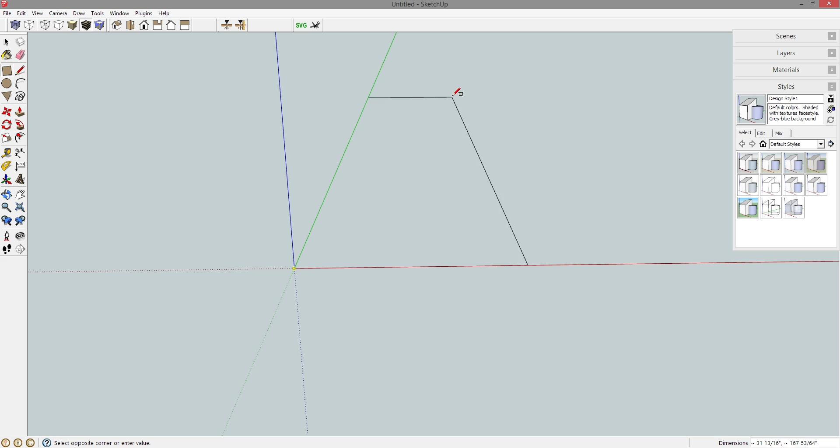But first I need to figure out my space, so let's draw the walls really quick. R for rectangle, the distance this way doesn't matter, but the distance left and right I do have a specific distance, so I'll draw my rectangle. First dimension is the longer of the two. Let's go with 33, comma, enter.

P for push-pull, let's go up 96 inches for an 8-foot wall. This particular wall is more than that, but that's all I need. It doesn't really matter. And let's grab this line.

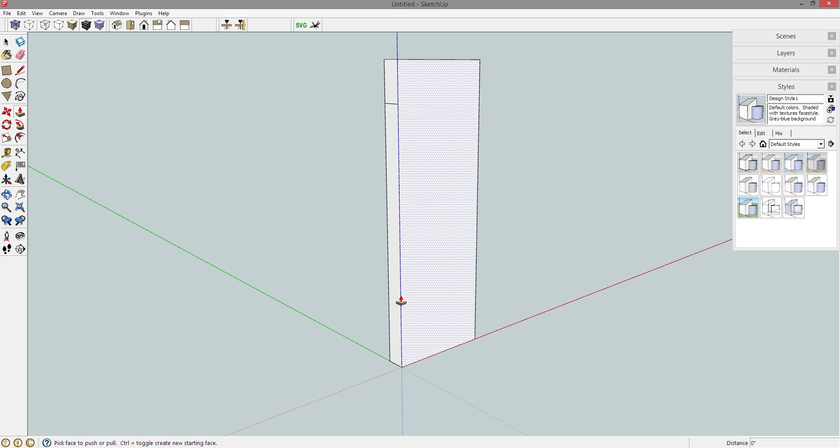M for move, control brings up copy, and let's push this up 83.5, enter. So basically, there's a doorway right here. This is the outside measurement of my molding, the door trim. This is the actual wall space that there is.

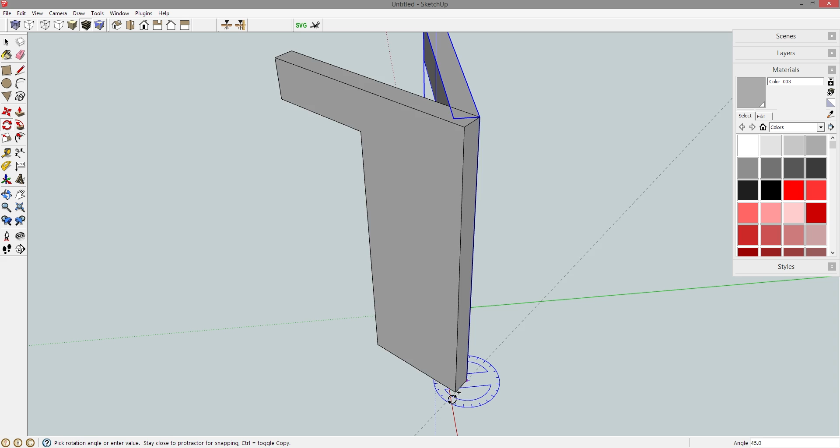Spacebar, triple click, G for component, enter. And let's go with gray because my wall is painted gray. Q for rotate, and I'm going to rotate another one of these along the blue plane. Control brings up copy, and let's rotate this 90 degrees, enter.

Because I have my front door coming in here, and then this is going into the hallway, and then this is the space that I want. But this is only about 10 inches.

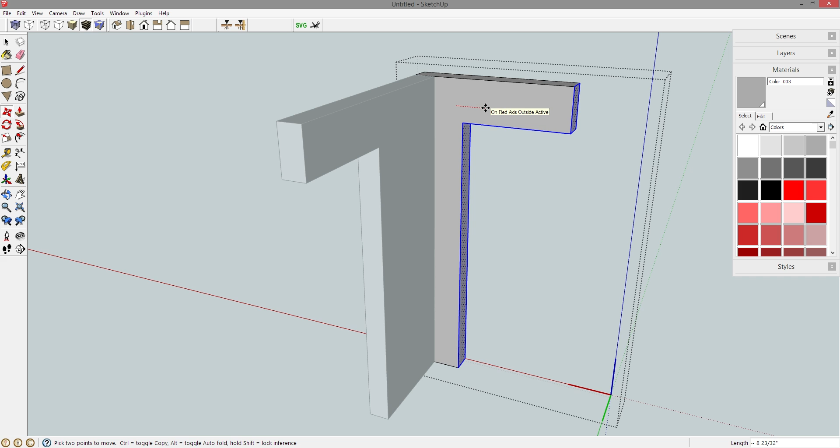So let's right click and say make unique. You are no longer a copy of this one. Let's double click to edit the part. Grab all of this, M for move, and let's move this to the wall. Move this constraining to the red axis to the wall, and then move it out 8 inches, enter. I think I got 8 inches there, maybe 10 inches, but anyway, that is an accurate representation of the wall in my house in which this project will be located.

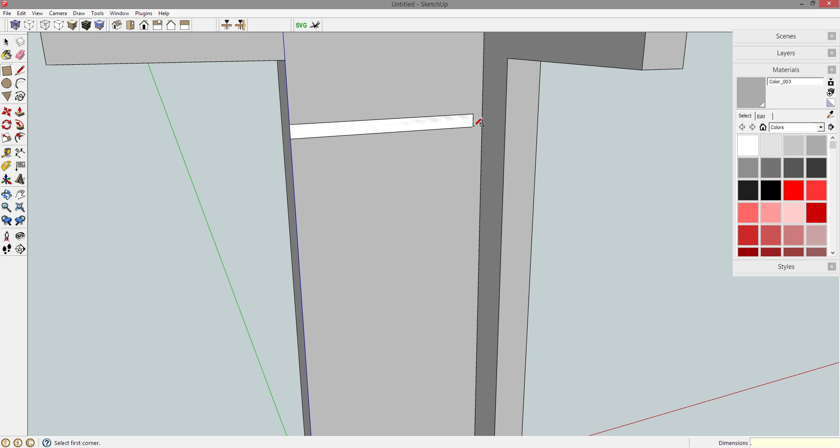So let's start drawing it. This is 33 inches, let's go 2 inches less than that, so R for rectangle, let's go this way. The dimensions say the smaller one is the first dimension, so 0.75, comma 31, enter. P for push-pull, and let's pull this out 6 inches, enter.

Spacebar, triple click, G for component, enter. This is the top shelf. Let's throw some color on it. And I want to center this on the wall. It's 2 inches shy of the full width here, so M for move, and let's move it in 1 inch, enter.

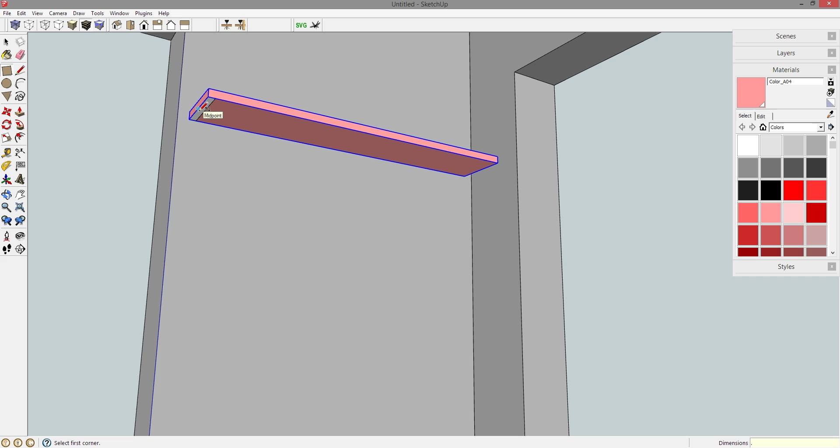Down from that, I'm going to have 2 vertical side pieces. So R for rectangle, and I'm just going to draw one right here. The dimensions say that the first one is the thickness, so go 0.75, comma, enter. P for push-pull, I'm not entirely sure on the full distance here, so let's just go with 10, enter.

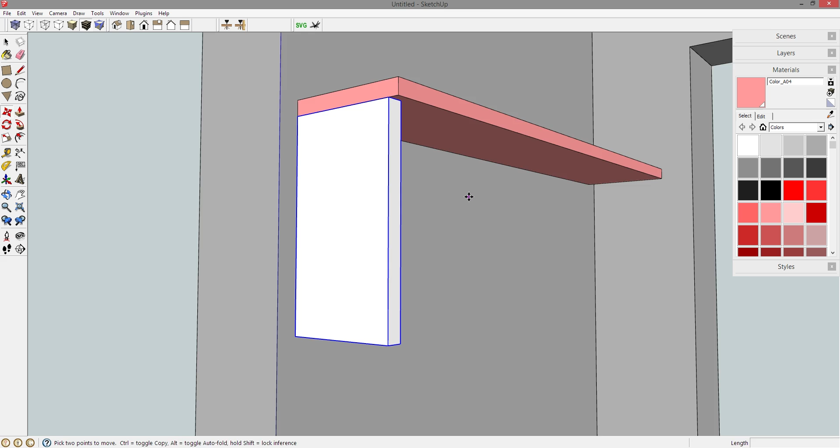Spacebar, triple click. Ooh, I want an overhang in the front, so let's back up a second. Let's click on this face, P for push-pull, and let's push this in 0.5, enter. Now, spacebar, triple click, G for component, enter. M for move, and let's move this in 1 inch, enter, for a 1 inch overhang.

Same thing on this side, so M for move, control brings up copy. Holding shift to constrain to the red axis once it is highlighted, and drop it off on the far right side, then move it in 1 inch, enter. Let's go with the next color here, which is yellow. Drop yellow on these 2 parts.

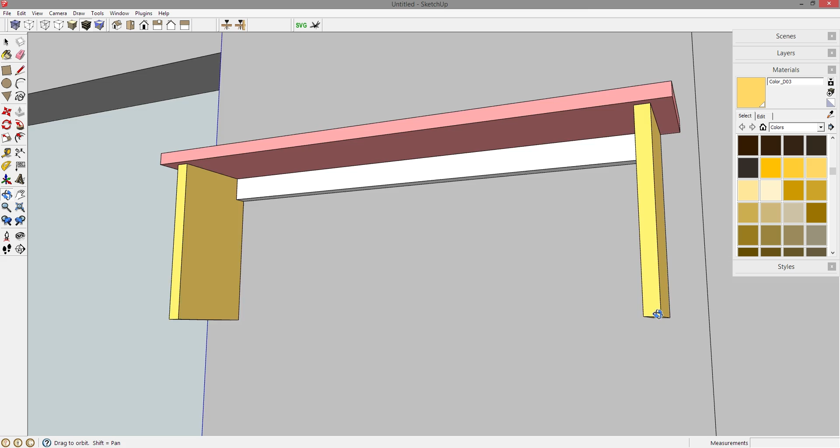Now, I've already looked through Google Images and figured out what I like, what I don't like. I'm kind of going for mission style here, so let's draw the top back rail, R for rectangle. And the first dimension is the longer of the two, so let's go 1.5, comma 0.75, enter. P for push-pull, let's pull this all the way over to this inside face on this piece over here. Spacebar, triple click, G for component, enter.

It is a new part, so it gets a new color, green is next. And let's go with the second rail, there's going to be another rail with a bunch of stiles in between. So M for move, control brings up copy. Let's copy one right down there, and then move it again.

4 inches, enter. So there's going to be 4 inch rails. Now this one's going to be a different size than this one. I've already determined that this needs to be 5 inches for the hooks that I've already got purchased. So let's right click and say make unique. You are no longer a copy of this one. And let's drop a different color on it.

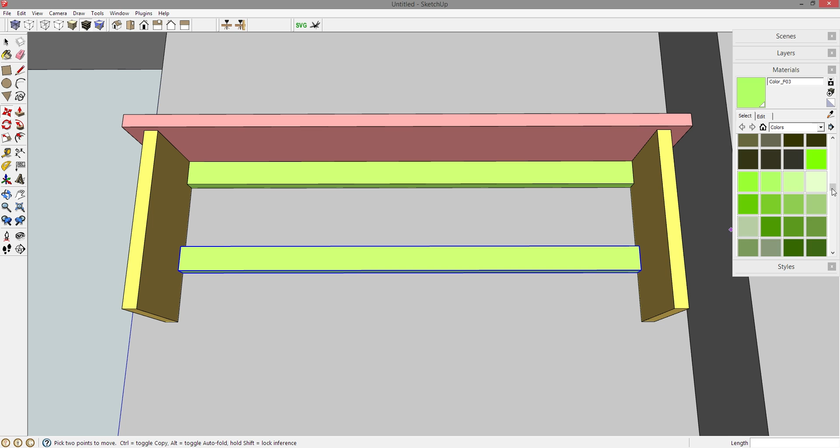That's fine. Spacebar, triple click, or spacebar, double click to edit the part. P for push pull, and it's already 1.5, and I want to go 5, so 3.5, enter. That's a 5-inch board.

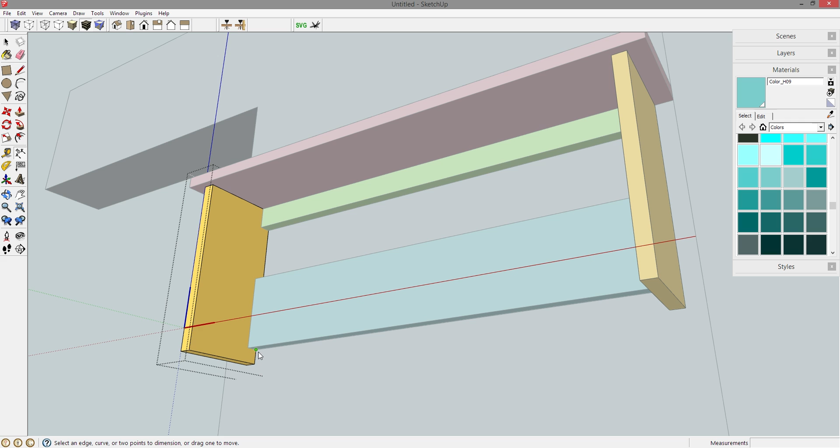This needs to be longer on the sides. So let's double click that part, grab this bottom face, P for push pull. Let's push it down to the bottom and then add another 0.5, enter. And let's go a little bit longer than that. Let's go with 1 inch, enter. So now it's a full 1 inch below. This is a full 1 inch below. There we go. So I'll still modify the sides, but I think that's going to be the accurate length.

Let's work on these rails to go in between. R for rectangle, and I'm just going to copy this shape here. The first dimension is the longer of the two, so let's type in 1.25, enter. P for push pull, and let's pull this down to here, to this edge.

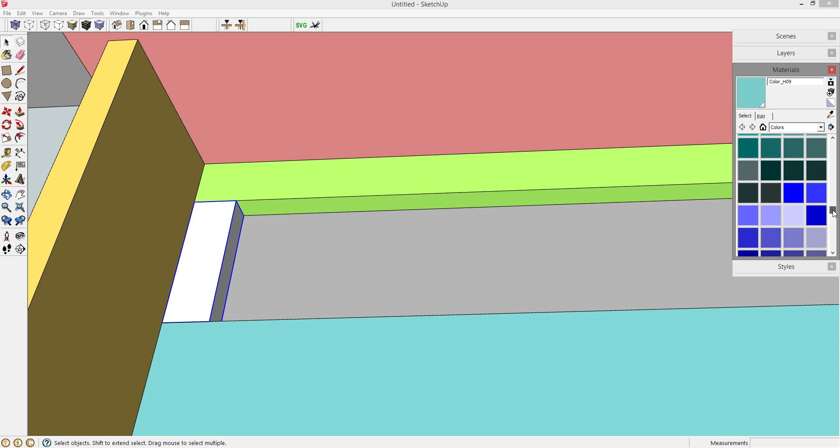Spacebar, triple click, G for component, enter. And this is a different color. Let's go with purple. So that's 1 1/4, and I want even size spacing in between. So M for move, Control brings up copy. 1 1/4 plus another 1 1/4, that's 2.5, enter.

X10 to multiply it by 10, that's too many. X9, that's too many. X8, that looks about right. D for dimension, what do I have right here? D for dimension is a custom keyboard shortcut I set up, by the way.

We've got 6 1/4, half of 6 1/4 is 3 1/8. So let's use a window to select all of these. M for move, use a window to select all those. M for move, there we go. This direction, 3.125, enter. And now this distance should be the same as this distance.

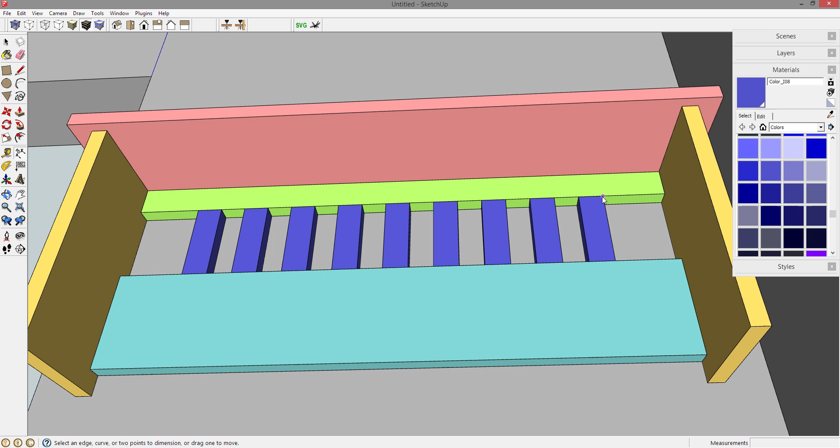It is, those are perfectly centered. So let's work on these shapes. These need to be shaped somehow. This is all arbitrary. You can do whatever you want here, but let's double click that part. T for tape measure, and I'm just gonna go with a long swooping curve.

So let's go down 1 inch, enter. Let's go this way by 0.5. What does that give me? That gives me 4 1/4. T for tape measure, let's go more than that 4 1/4. Let's go 5.25, 5 1/4. So this is the arc shape that I'm going to get, and this is the straight line.

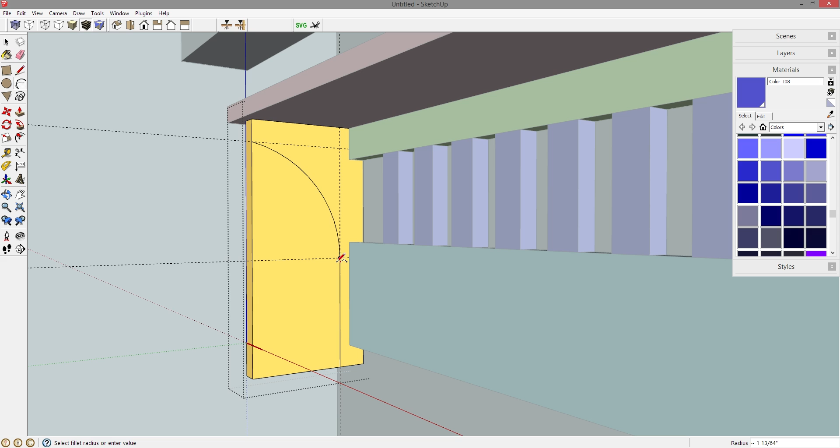L for line, let's go up here. A for arc, starting here, ending here, and I can drag until it's tangent at vertex. That means it's a perfect transition from the straight line into here. That's what I want. P for push pull. Let's push this way and delete it. Spacebar to select all of these hidden lines, or guidelines I should say. Delete those, click to get out of the part.

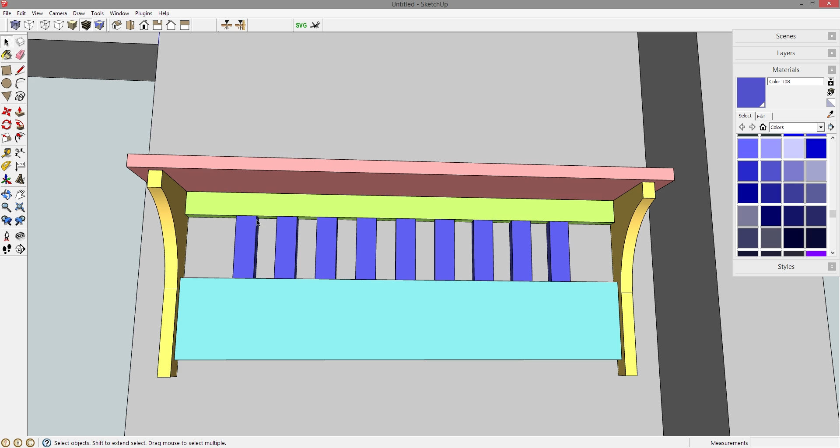And I like that. Simple, yet elegant. The joinery, totally up to you. Whatever you want to do. You can use dowel joints, you can use whatever. But something I will share about this, let's go ahead and hide this side piece. I'm probably going to use floating tenons. It's quick and easy for me.

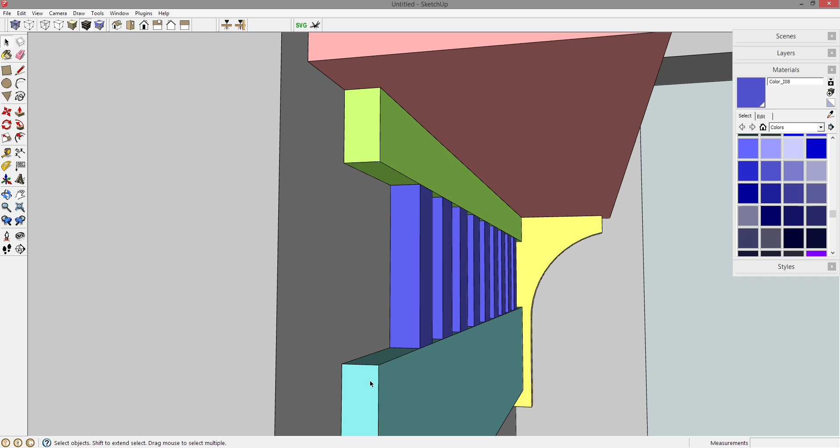But if you can do tongue and groove joinery on the table saw, then you can do a groove here, and then just use a typical tongue and groove joint for all of this. These will fit into the top and bottom rails just fine. And then cut some square stock to fill up the groove, and cut a bunch of spacers that will fit in between here. You'll get even spacing. It'll cover all of the grooves, both the top and the bottom, and that should be pretty easy. So there's multiple ways to do everything, obviously.

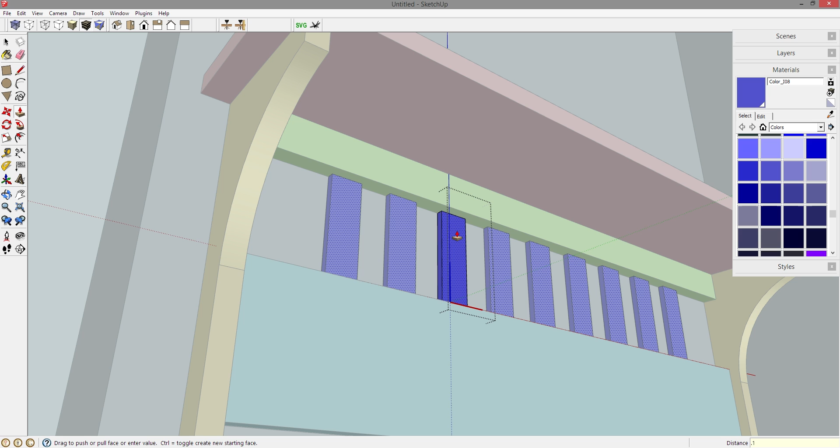Let's unhide to go back to where we were. I do want these rails to be inset slightly. So let's double click that part. P for push pull, and I'm going to push them in 0.125, enter. Just gives it a little bit more look to it, a little bit more depth, which I like. And of course, edge detail can be accomplished however you want as well.

Let's make a quick little layout for this, materials list or whatever, figure out what we need to make this project. First, I like this camera angle. I'm just going to make a scene and call this new scene overview.

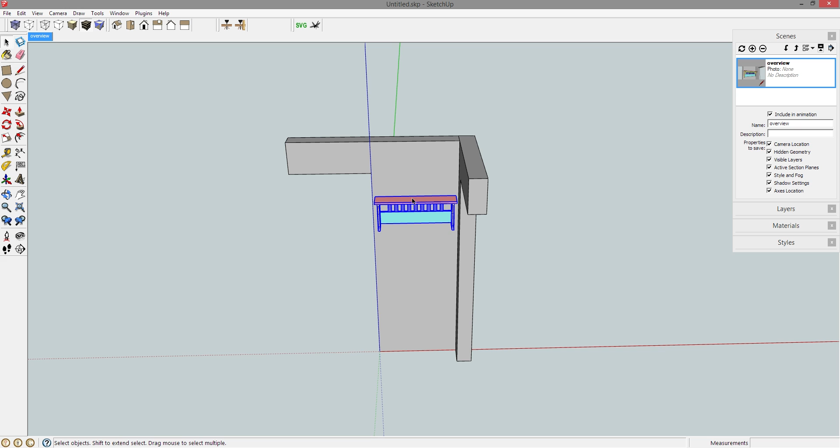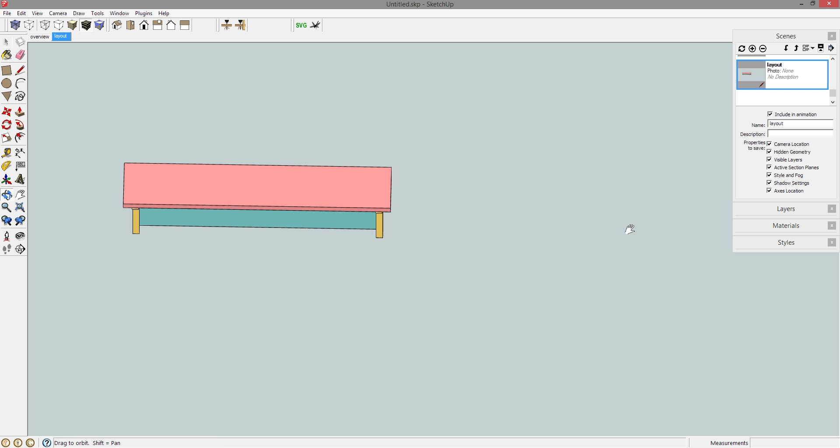I'm going to zoom out a little bit and grab only the project. M for move, Control brings up copy, let's copy the whole project over to here. Grab all of this, H for hide, which is a custom keyboard shortcut. Let's change the camera to parallel projection and make a new scene called layout.

Let's move this piece over here. This is 6 inches wide, so it can't be on a 1x6, it'll have to be on a 1x8. R for rectangle from this corner, drag in the direction, drop it off. The first dimension is the longer of the two, so let's type in 96, 7.25, which is the size of an 8-foot long 1x8 board.

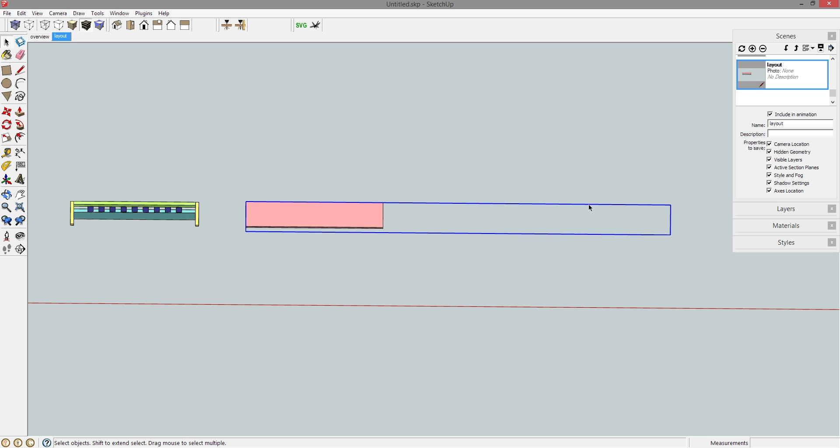Let's spacebar click the middle, delete it, triple click the outside to select all the model space geometry, G for component, enter. That way I don't modify the shape of this board accidentally.

Let's grab this, Q for rotate along the green axis, drop it up 90 degrees, enter. M for move, and let's move it into place. Let's delete the copy of that.

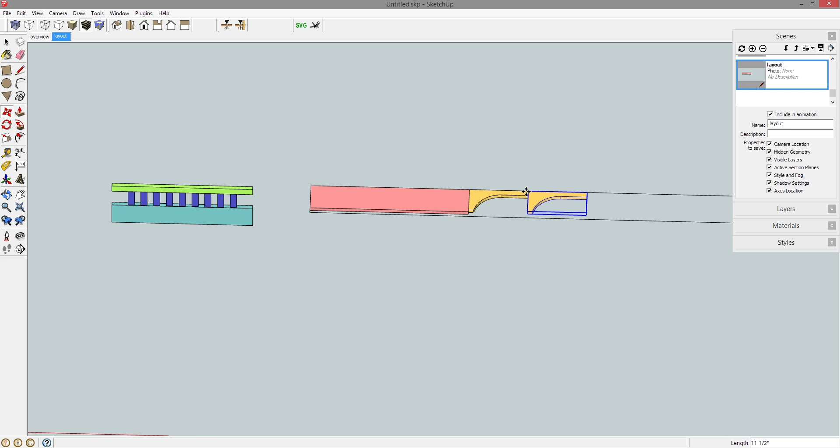It's easier to M for move, Control brings up copy, to copy one side by side than it is to manipulate all that geometry again. Q for rotate, and let's rotate all this 90 degrees, enter. M for move, and let's just grab this one right here and set it into place. Let's grab this, M for move, and it looks like it will fit right up there.

All of these, I only need one. There's 9 of them there. 1, 2, 3, 4, 5, 6... 1, 2, 3, 4, 5, 6, 7, 8, 9. There's 9 of them, I don't know why I couldn't count that.

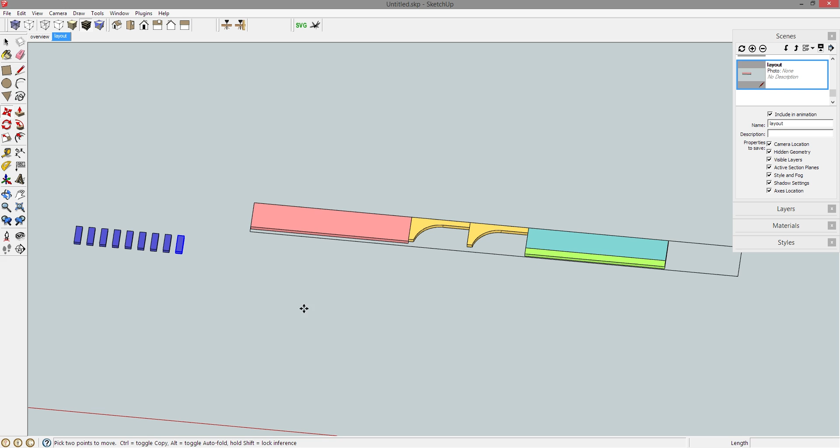But anyway, let's move these right here. Q for rotate, let's go 90 degrees like so. M for move, move this over to here. Control brings up copy, set one side by side, X2, enter, all of these. M for move, Control brings up copy, set them up there, X2, enter. 3 by 3, that's 9 pieces right there.

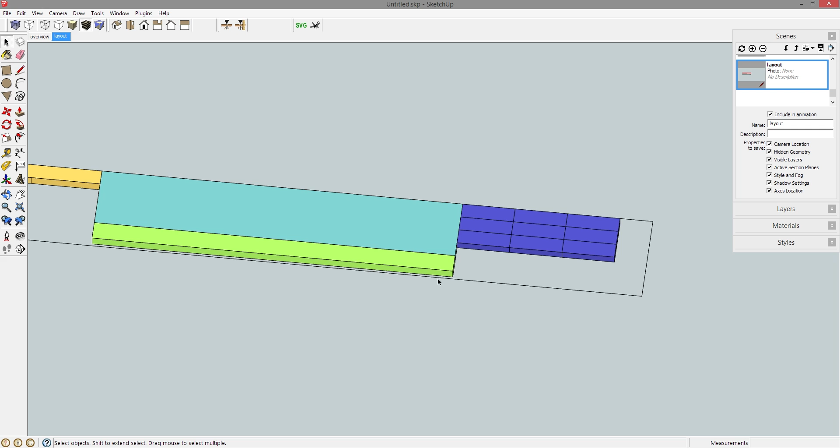Plenty enough room over here, and here, for all of these saw blade curves. So that's all my pieces. Don't need those, let's delete them. Let's go to the top-down view, turn the axis off, and let's right-click and save or update our layout.

This isn't the most optimized use of the board. I can obviously take this and rotate it 180 degrees and then move it into place like so. That'll be a little bit more optimized, and then shift all of these down. But that's pretty good. So D for dimension, I'm going to go ahead and dimension this out. Doesn't have to be perfect, this is just to give me a printable diagram that I can take with me into the shop.

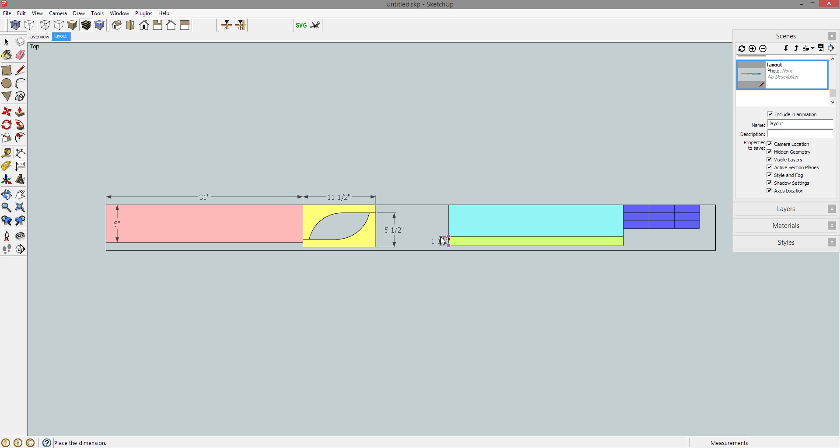And the dimensions of all this curved geometry is completely up to you, it doesn't really matter. So let's dimension this out. And some of these dimensions don't really look that great, like this 1.5, you can't really see it.

So there's a couple different things you can do. You can change the size of the font here, or just grab a text leader and type in 1 1/2 inch wide to make notation of it, whatever you want to do. Typically what I do is just, once I've determined the size of the image here in my scene, double click to edit and then add some spaces to push it off to one side. Quickest and easiest, and when it doesn't really matter as far as looks, all you're interested in is the information, and that's really all you need.

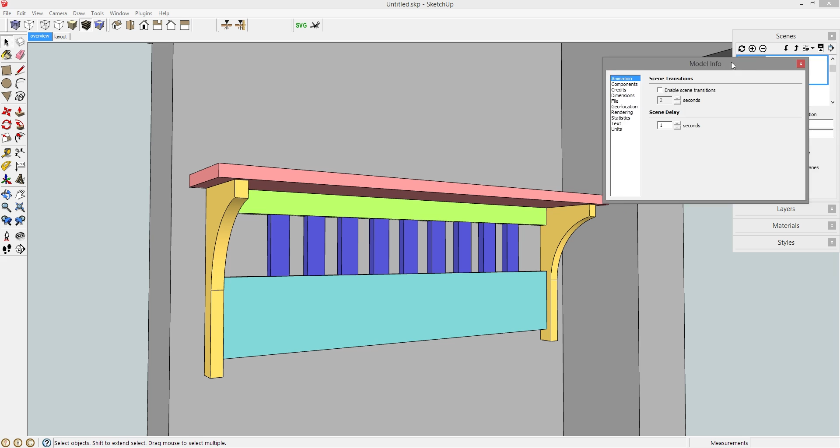So there you go, quick and easy project. I can't stand scene animations, let me go back to my model info and uncheck that. There we go, I can't stand the scene transitions. All right, so this is going to be a quick and simple project.

I need 5 inches right here for the hooks that I've already purchased. This is going to be painted white to match my trim. I hate painting projects, but it'll be all right. Quick and easy project, here's the layout, all my dimensions that I need, it's all the information that I need.